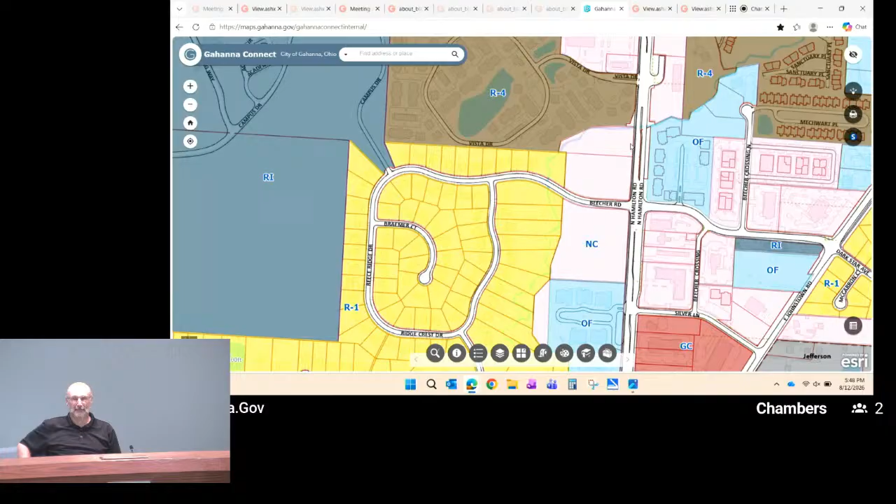Thank you very much, Madam Chair. Michael Blackford, Director of Planning. Before turning over to the applicant and Planning Commission, just a few words. As you said, Madam Chair, the workshop is really an opportunity for Planning Commission and the applicants to have a dialogue that you really can't normally have in a normal Planning Commission meeting. So it's a great opportunity to ask questions of all sizes and shapes and get information that might benefit you in the future when we have applications.

As of right now, we do not have any applications submitted. If they choose to move forward with the project, most likely they would be before Planning Commission with the development plan and probably a conditional use and a variance. After that, they would go into engineering and building permits. So there's more opportunities for engagement, whether it's Planning Commission, staff, or the public. It's really at those Planning Commission hearings that's the most appropriate time for staff and the public to be involved and have words tonight about the project.

This site's a little different than some of the other sites we've seen in the past. So just to make sure we're all aware where we're at, I have a zoning map up here. Zooming out, you can see the properties on Hamilton Road. To the top of my screen, to the north, you have Giant Eagle and Stone Ridge. Here is Beecher Crossing. This is Graeter's, as someone pointed out earlier. And right here, this lower half of the parcel, that's the one we're talking about tonight. The property is zoned neighborhood commercial.

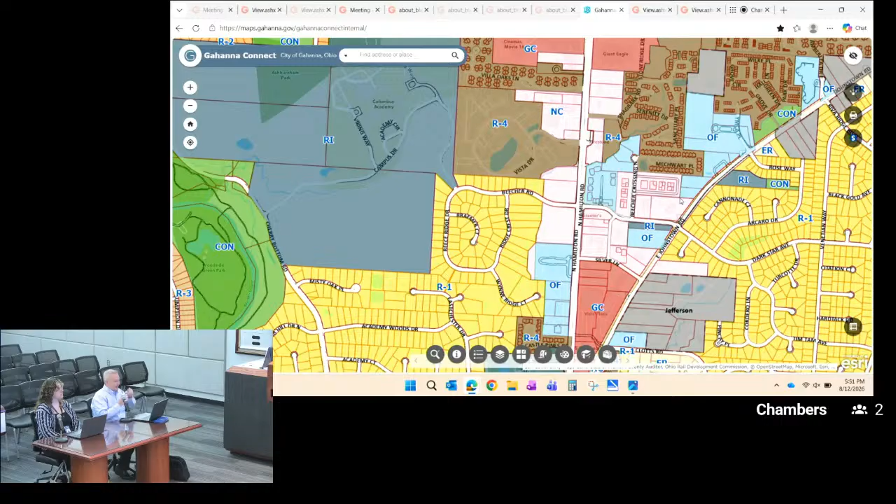There is some project history on this site that I think is relevant for discussion, whether tonight or in the future. There were a couple of applications submitted on this property: one was a development plan submitted in 2018, and another development plan submitted in 2019. I believe Mr. Soriano was on the Planning Commission for both of those applications, and Mr. Greenberg and Mr. Tamarkin were on Planning Commission for the 2019 one. I will show the 2018 project here real quickly so you have an idea of what was approved by Planning Commission.

All right, so on your screen right here, north is actually on the left of the screen, east is towards the top here. This is what was approved in 2018. At this time, it was the Shops at Oberer's Crossing. The flower shop Oberer's was going to be the main tenant. I think it's about 35,000 square feet that was approved on this site. That was approved by Planning Commission.

It was appealed by the neighborhood, and the Board of Zoning and Building Appeals agreed with the residents, so they overturned Planning Commission's decision. That's why we had a fairly similar request in 2019.

That request, I think, looked fairly similar to what we see here, where the proposed building on the right side of the screen was a medical use. That was unanimously approved, I believe, by Planning Commission in 2019. That was appealed to the Board of Zoning and Building Appeals, and they overturned Planning Commission's decision. There was some litigation that happened on the property, and the city entered into a settlement agreement.

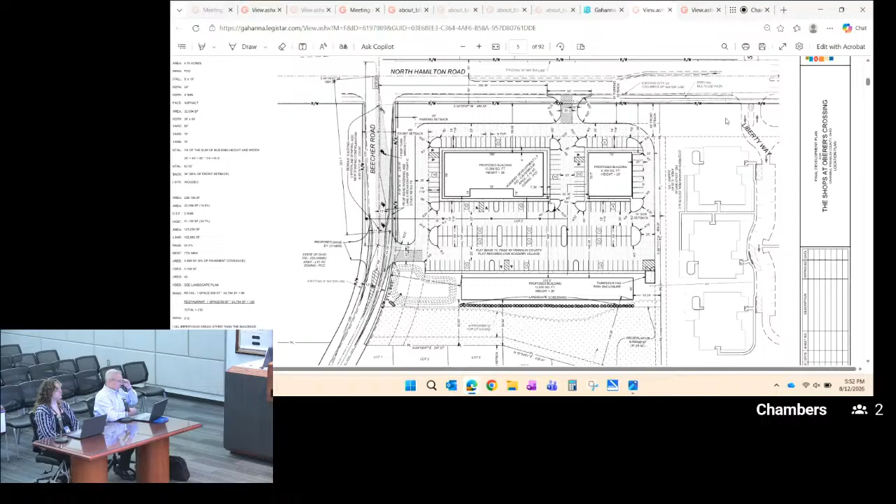And so that property right now has the rights to construct what we see up on the screen right now. So this site plan, hopefully this shows you what the renderings look like. There were one-story buildings, there's not really a good overall rendering here. So they have the right to submit for building permits, engineering approvals, and they could go out here and construct this.

Without needing Planning Commission approval, that is. To deviate from that site layout and building design really requires going back through Planning Commission in 2026 and getting those approvals again through a development plan, conditional use, and design review. If they decided they wanted to build this particular project and operate their facility out of here, they could absolutely do that without Planning Commission approval.

But I don't believe that's the intent or the desire. So this is a great opportunity to work with Planning Commission and the community, and it's really a different discussion today than it was in the past. Commercial is appropriate on the site, and it has been zoned commercial since at least the 90s or 80s, so it's not really a discussion of whether commercial is appropriate, it's really how that commercial is going to look, because now they have entitlements, whereas in 2018, 2019 it was about trying to get those entitlements. So now we're just making sure that what's proposed works for the community as best as possible, and with the applicant. With that, Madam Chair, thank you for your time, I'll turn it back over to you.

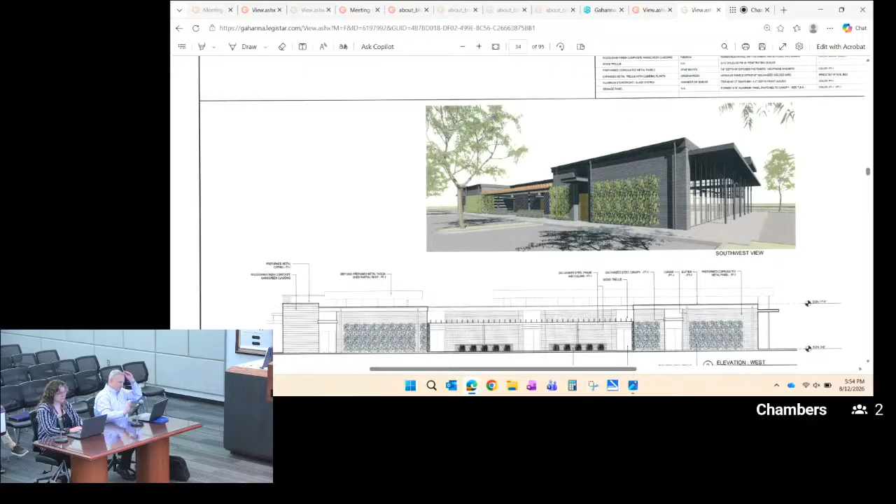Thank you very much for that presentation and the context with the history of the property as well. We will go ahead and open it up to the applicant, if you want to step forward. This is going to be more of an informal session because it's a workshop. I'd like you to state your name and how you're affiliated with the project, and I'm sure we will have questions from the commission or comments.

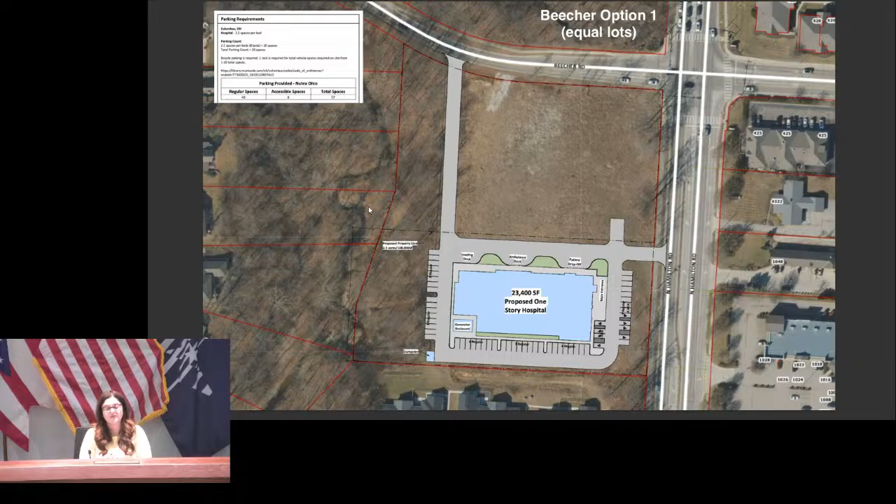Thank you. My name is Tom Cherrick, I'm the president of Wealthy Development. We're based in Akron, Ohio, an 81-year-old real estate development business. We're partnered with Nutex Health, a publicly traded micro-hospital business on the NASDAQ, with a little over 75 different micro-hospitals throughout the United States and expanding. We got involved in this opportunity because we love this Columbus market.

We love Gahanna, we've been looking for a market in Gahanna specifically for the last five years. We have not been able to find the right location with the right traffic, demographics, and the right feel. We feel this is a very good location, so we found it in the last six months. We reached out to the owners and said this feels like the right time to develop a new micro-hospital, create a great service for the community. It actually fills a gap. We're not an ambulance, emergency center, we're not a high-traffic business.

As I heard, there was a previous applicant that looked at doing a similar service. We are a publicly traded company, providing private pay, low density, low traffic, high white glove service for the customers. So it's around 23,000 square feet, single story, very similar to what was designed previously, open 24 hours. So if somebody gets sick, you don't go to the ER, you're able to come here. Private pay, private insurance, homegrown local doctors. The doctors are based here, reside here, lived here, grew up here. They're partners in the business. So it's local doctors, local owners, partners with us. That's our initial speech.

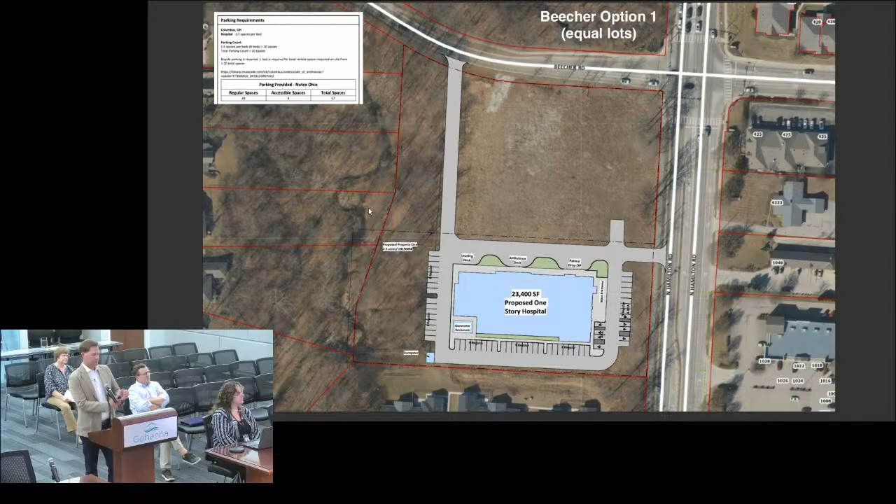Clicker work? It's not working. Oh, nope, you go to the next one.

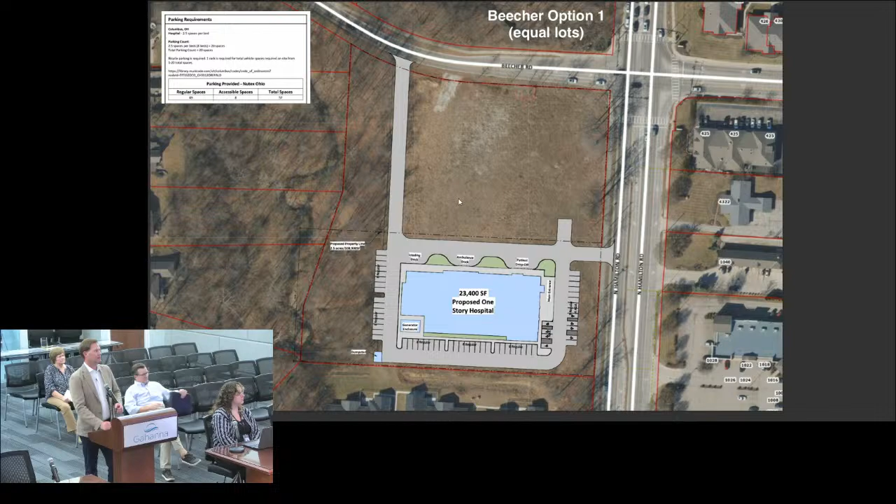Perfect. We've done 70 locations, they look similar to this based on the feedback from the community. Single story, awnings, overhangs. It's 2.5 acres, a 23,000 square foot building, so it's 100,000 square feet of land and a 23,000 square foot building on that land. So it is not overencumbering on this area, it's not too tall, fits in the area, and it is accessible to residents.

Palette, color, final design is always something where we take input from the community, the planning commission, all the stakeholders, and we design and modify to fit the community, but this is the general feel. One story, 23,000 square feet, patient rooms, three or four overnight. If somebody gets real sick, they can stay overnight. They have a small medical procedure, appendix bursts, and they can have it planned. Small medical procedures.

That's our market right there. Not a lot of traffic, not a lot of people coming in and out, a handful of doctors, a handful of nurses, and pre-planned medical procedures. Somebody's son or daughter sick in the middle of the night, not worth going to the ER, they're able to come here. That serves our purpose. So I want to open up to questions.

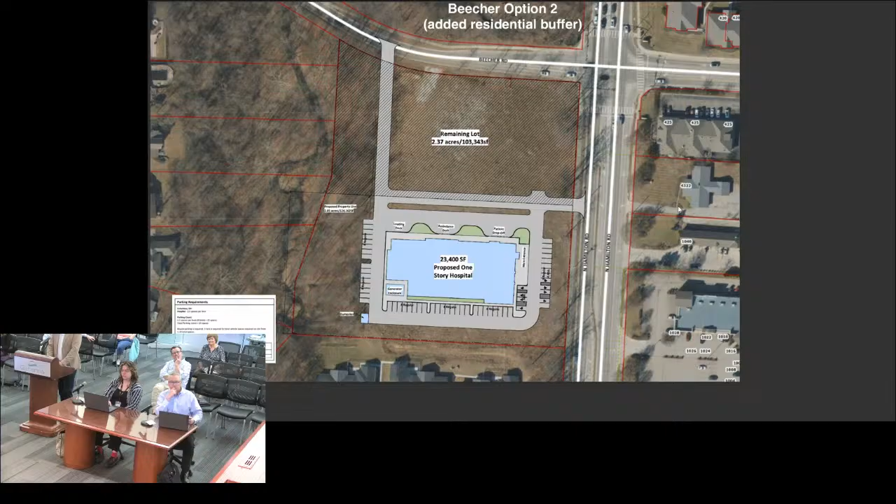Is there any thought, if we went with something like this, about water detention — will that come later in the engineering drawings, I assume? Yes, so in the initial concept there'd be a water detention plan with the civil engineering, in conjunction with the current owner, that would be complementary, trying to be very efficient and aesthetically pleasing, but that's further down the conversation.

Okay, well I'm sorry if I wandered off and you hit on this — how did your discussion with the HOA go? Very well. We're open and honest always with all neighbors, always community, because they're our clients and we are neighbors.

It's very important, especially when you're a contiguous property, to have a very open relationship with your neighbors. So we talked about our size, our traffic, our opening hours, how we're not a company that has 400 cars coming in at 8 in the morning when school lets out. We're not a business that affects that. We're not an impact there. Very open conversation about nighttime patients - they stay, but it's quiet, internal. We're not coming in and out during school hours, not impacting when they go to school or when the community goes to work or comes home. We're not a huge impact there. We're a very boutique, white glove service business.

I was just going to throw this out there - being a hospital, would you accept any emergency squad, anybody? Over the last 10 years, we've had one ambulance come to one of our locations. That was due to an emergency where no other facility was open and available within life-saving time, and they came to our facility, and we welcomed them. It is not our target market. It does not happen very often. There are buses that show up, but their lights are not on - they're transporting them from a different facility. It's managed care.

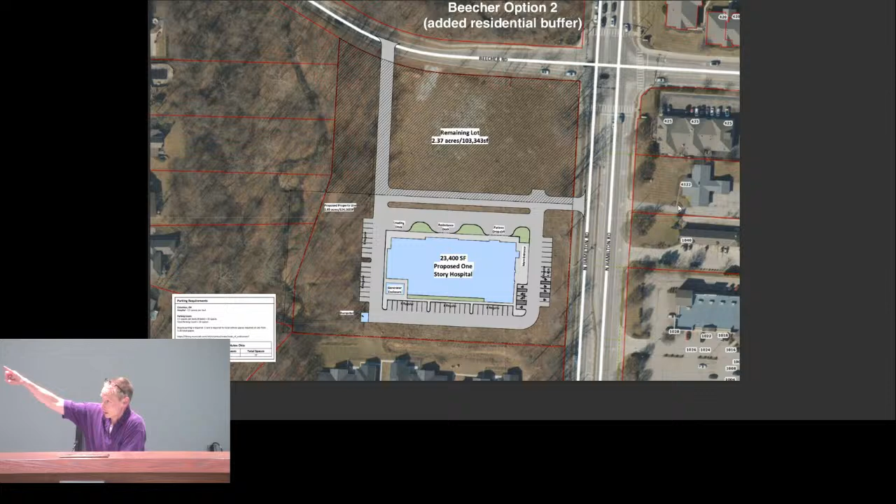And that's just one person speaking here. And then I would also be correct to assume that if this came to us, you'd be constructing both access points to Beecher Road and Hamilton Road at the same time? Yes. Okay, it's not going to be a phased type thing.

Okay, and how many beds would the facility have approximately? 3 to 4 procedure rooms and a handful, less than 5 actual patient rooms where they come and check in, where the doctor rotates people through. Okay, and...

With your other facilities, are there a lot of overnight stays, or is that just on an as-needed basis? As needed. In general, over a given 30 days, there are multiple overnight stays, but those are for planned procedures where they have a procedure done and are meant to stay overnight and then get released the next day. Okay, so it's not going to be a high volume, high turnover type of facility? Okay, alright, thank you. Those are my questions, Madam Chair.

Thank you, great. Mr. Soriano. Yes, so it's kind of funny that maybe I am the elder planning commission member that was here in 2018 when we went through this before.

If I recall, I think one of the big topics of discussion was traffic on Beecher because of the lineup and access to Academy. We talked a lot about site intensity and what that meant for the way it was zoned, and the potential that the intensity could vary considerably depending on what type of development went there. So it's actually good to see something similar to what we approved.

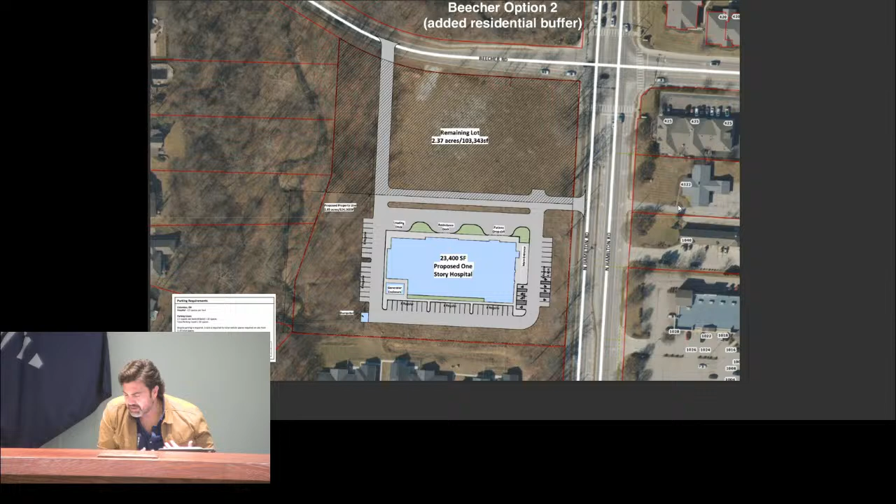I did have a couple questions. Mr. Mako covered a couple, but would we expand a little bit on what micro-hospital means? Is it more like ambulatory care? You mentioned procedure rooms, you mentioned some inpatient rooms. How would we classify this?

So this is a true micro-hospital. If you need your appendix out, you can schedule that at this location, have the surgery, stay overnight, and get released the next day. If you need your bones reset, you have a broken bone, you get a cast, and if it needs surgery you have an orthopedic person actually do the surgery here and you'll get released the same day. So it's a full range from orthopedics to appendix, with a handful of local doctors doing procedures here.

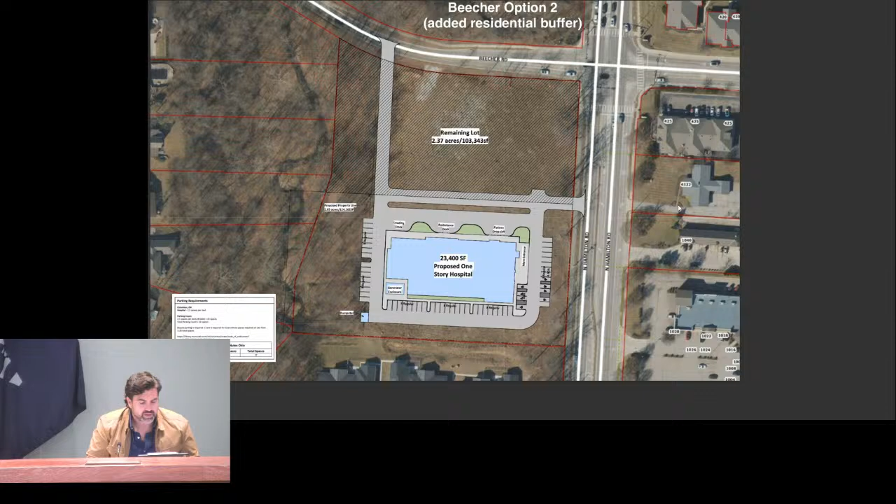I prefer a little bit of that buffer off of that spine that's coming in. I think it also sets up the lot to the north with a little more flexibility, and potentially some buffering on that strip, as Mr. Mako and Mr. Shapaka were noting. So generally it makes sense. The rendering looks like what I would expect for a micro-hospital.

I don't really have any more questions, mostly comments. So thank you. Ms. Laser.

Thank you. They asked most of my questions, but about how many doctors and nurses or staff are there on a given day?

Doctors rotate through during the day, so they may be there for 4 hours. On average, 8 to 10 people in the building working. A doctor may be there for a procedure, then leave, and another doctor comes in for the next procedure.

And I also liked option 2, for a vote. Okay, that's it, thank you. It gives us a good basis to start our conversation.

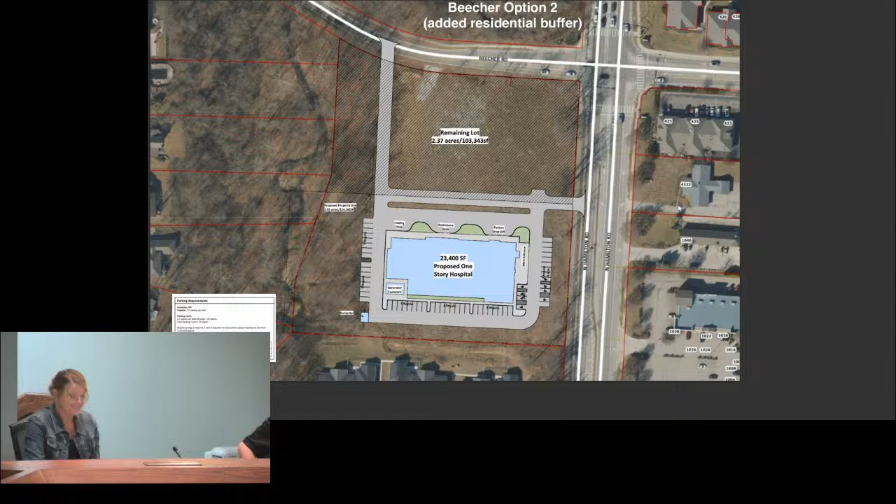Great. Mr. Greenberg. Hi there. I have a question about the patients coming in. So it's not just a 24/7 emergency room—you can make appointments and get your surgery. But it's kind of strange, if you have an appendix, that's more of an emergency.

It was an example, like gallbladder removal. So what happens if you're very successful—which we'd hope you would be if you got approved in Gahanna—and you're getting lots of appointments, more than what you're describing today as a pretty minimal effort, and it turns into a lot of customers coming in. If you're successful, all of a sudden you aren't a micro-hospital anymore.

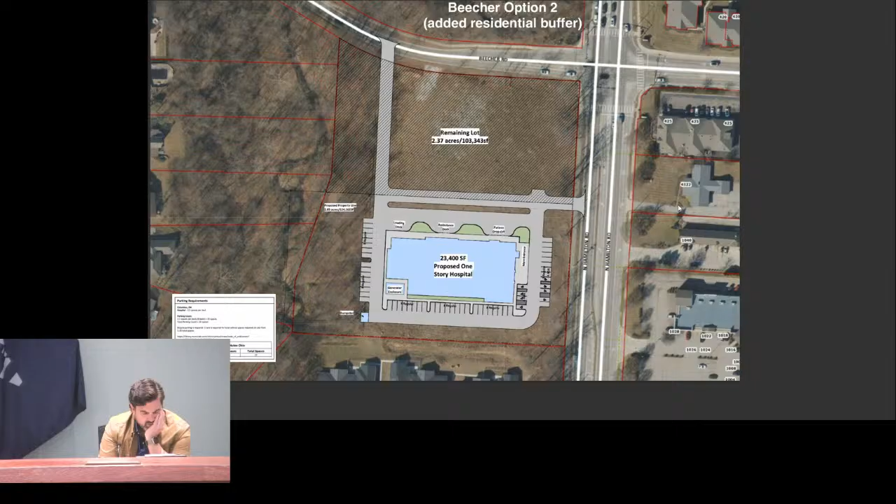So thank you for the question. Our business model, when we enter a market—Columbus is the MSA—is to have multiple locations. This is our first location in this market, and we would be looking to open additional locations.

That relieves much of my question. Got you, okay, so there'd be more than one in different communities, okay. On that, are those sites behind the hospital still there for development?

Do we know? I assume that's part of the property. Mr. Greenberg, are you referring to the red boxes to the left? Yes. Those are part of the residential lots, residential, of Academy. So if you were to measure where their proposed building is and go to the west, to the left of your screen, to where that home is, that's right.

About 405 feet or so. So those are very deep lots. What's our zoning say as far as that? How close can they be?

I love using the Shops at Rocky Fork as a comparison since it's right down here, basically the same zoning where the commercial is and the same zoning for those residential. So code is going to say 10 feet, plant a tree every 40 feet, and have a fence. Here we have, not all 400, but let's say 350 of those feet are heavily vegetated areas that communities would probably love to have as the standard, because it really mitigates the perceived incompatibilities of commercial and residential. So we basically have about 40 times what the code requires for separation in this case.

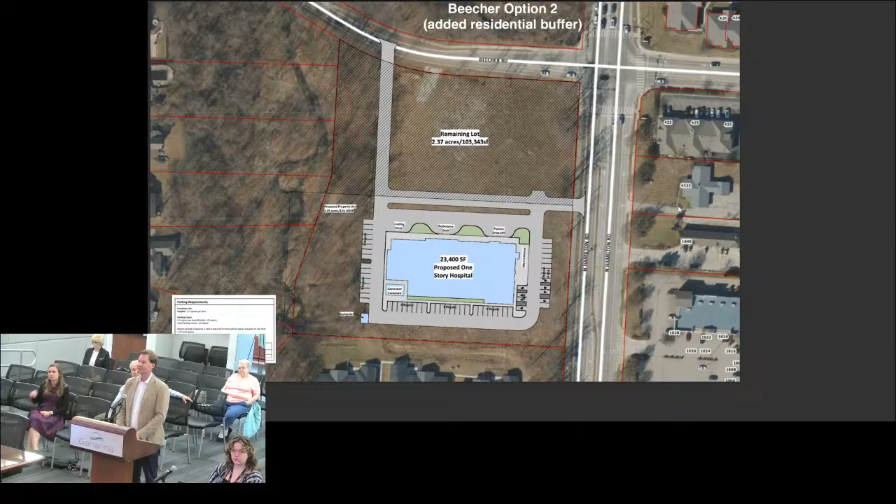I guess a couple of comments on things that went wrong the second time, in 2019. First, I think that land behind is very sloped with a creek through it, so it's really not developable. You can kind of see the creek in the picture there.

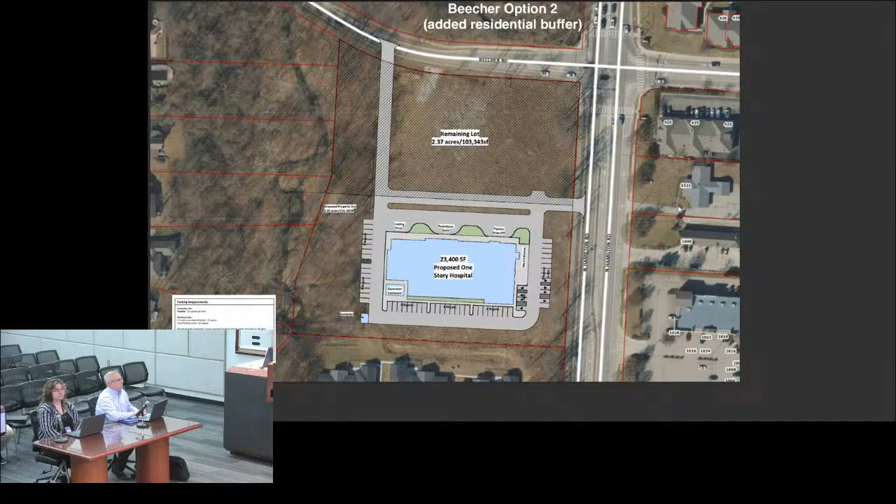But following up on Mr. Greenberg's comment about a fence, or some plantings — the last time, I don't know what the second was, in 2019, the residents were very concerned about what they see and what they hear, and I think that could be mitigated, possibly with some greenery, some plantings, or as Mr. Greenberg said, a fence.

They were also concerned about noise, so you say there's no ambulances or very few, but the picture you showed had an ambulance in it. So medical transports don't have lights or sirens. They transport people from a senior care facility to a micro hospital and back, as a medically licensed facility, for somebody that needs help. It's not a full lights-and-sirens ambulance. It's a medical transport, one time in 10 years for all facilities — it's not a target for ambulances.

There are other facilities within the community that can handle that. If there's a need for someone in the neighborhood for an ambulance, they're driving past you and going to Mount Carmel. They're not stopping at your hospital with lights and sirens, unless you ask them to stop specifically and you made an appointment or have a relationship — otherwise you're going past.

I'm aware there's 81 houses in that community, so it's not a substantial community. No, but what you have there — there's a private school back there, and this is one of the two exits from that school. So that neighborhood is very sensitive to traffic, very sensitive to Beecher Road backing up from 7:30 to 8:30 in the morning and from 3 till 4 in the evening.

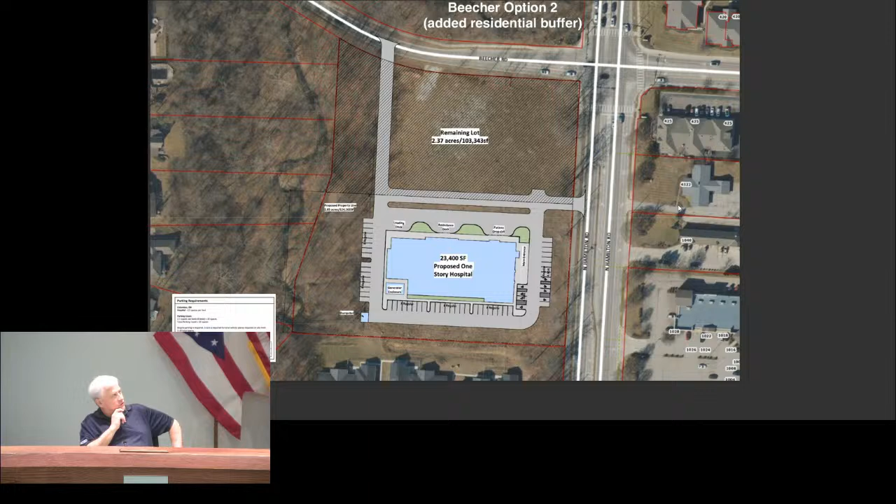So it's right-in, right-out on Hamilton. It's only going to be right-in, right-out. There's a median — or is it a fifth lane? No, a median. There's a median, okay. So you have to come in. First, the fence.

We talked a good amount with the HOA and listened. During the winter, if this moves forward and gets welcomed by the community and the planning commission, we would actually go out there in the winter to see what it looks like with the leaves off, because she shared openly that you can't see this property in summer when leaves are on and it's green, but in winter you can. I said, let's get pictures, and you need to do the right thing for the community since you're neighbors long-term. There's a lot of slope back there, so a fence might be more difficult than shrubbery or landscaping to treat it appropriately for the winter months, not just the whole cycle.

For the access, we talked a good amount about traffic. We are not high retail, not selling a lot of coffee at 7:30, 8 o'clock in the morning with hundreds of cars. We're not selling chicken sandwiches. We're boutique during the day, not at 4 o'clock when everybody's leaving after sports practice. We're not creating hundreds of cars. That's not our market, that's not our goal, it just doesn't fit our business model.

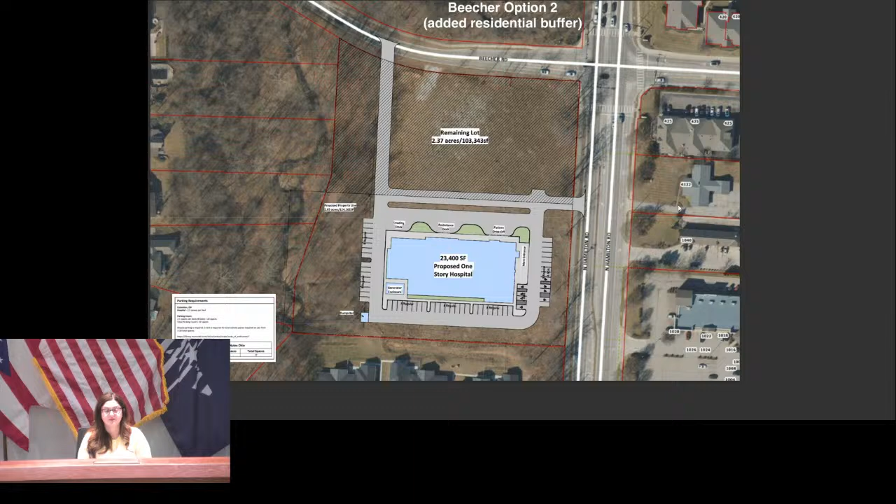Yes, I have one, Mr. Greenberg. One additional question. We've talked about how it's for procedures. I'm feeling terrible, I've got a really bad cold, maybe pneumonia. Can I just stop in and see a doctor at 2 in the morning because you'd provide that service? Yes, okay, yes.

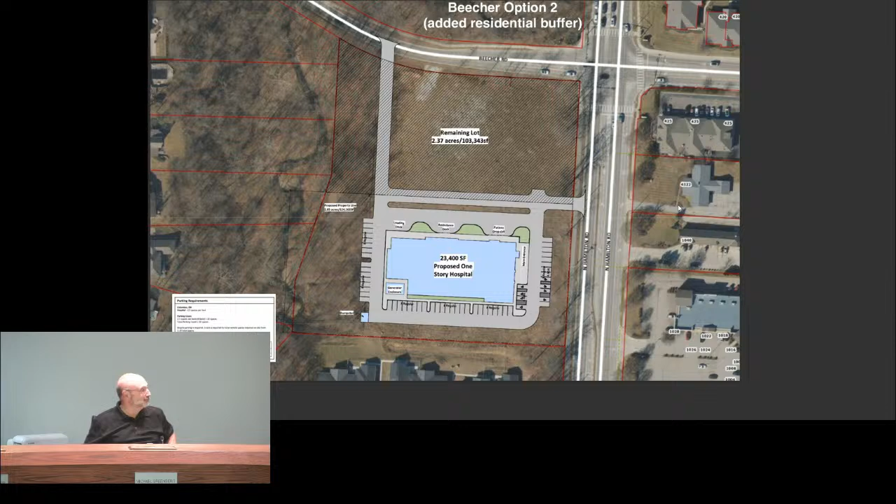Thank you. Mr. Mako and then Mr. Chapaka. Thank you, Madam Chair. One additional question, and I'm not going to hold you to this, but do you have a timeframe for feedback and then submitting a formal application?

Based on the feeling I'm getting from this committee, we would move forward with our purchase agreement, closing on the land. Within 4 months we'd be going through our planning commission, design, permitting process. By the end of the year, by spring, I want to be in the ground. Okay, fair enough. I was just wondering how advanced you were in your plans.

Yes, so we have a template, a business model we repeat over and over in different cities. We take the same rectangle and put different skins on it to make it aesthetically pleasing to match the city. So it's a very efficient process for us. Okay, all right, thank you.

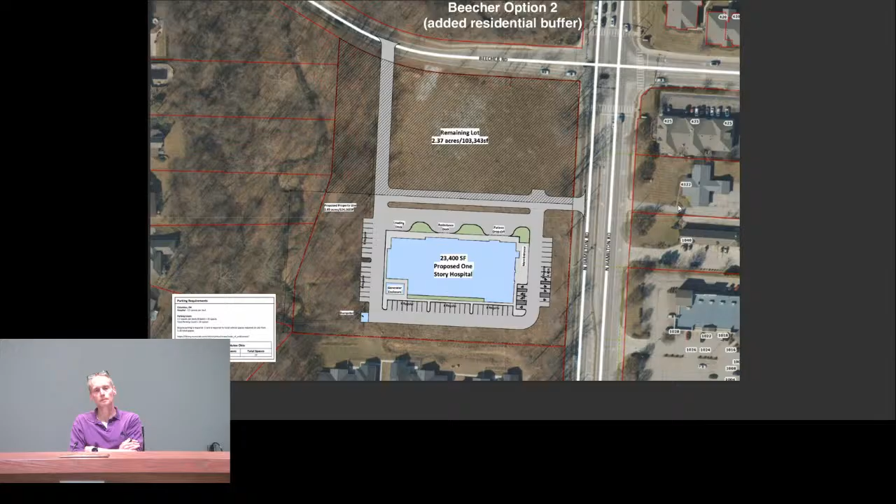Thank you, Madam Chair. We have a few more minutes. Mr. Chapaka, go ahead. Thank you. Micro hospital again. So you don't have yearly checkups there, you don't have a doctor working out of there, you're coming in and doing your routine stuff.

That's not our target market. Okay, not our target market. So I'm still having trouble with the numbers, because I'm used to hospitals having beds upstairs, floors and floors of beds, and you're not proposing that at all. Everything's down low. So the micro—I'm just kind of interested to see how this all plays out.

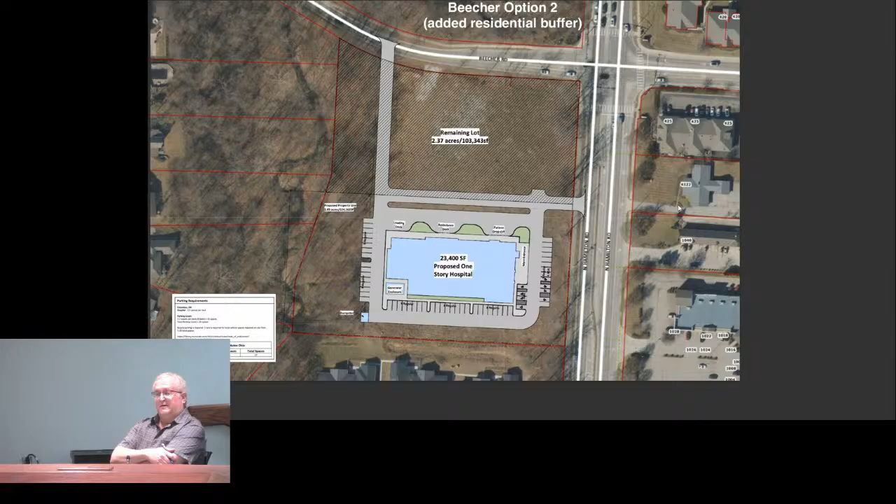Rotating doctors are there for a handful of hours, do procedures. The patient stays. The business model is to rotate them through, one a day, and they rotate through, do a procedure, doctor comes and goes, they can go work at a different hospital and do other things. This is not their only operating place, and it's a very efficient, lower overhead business model.

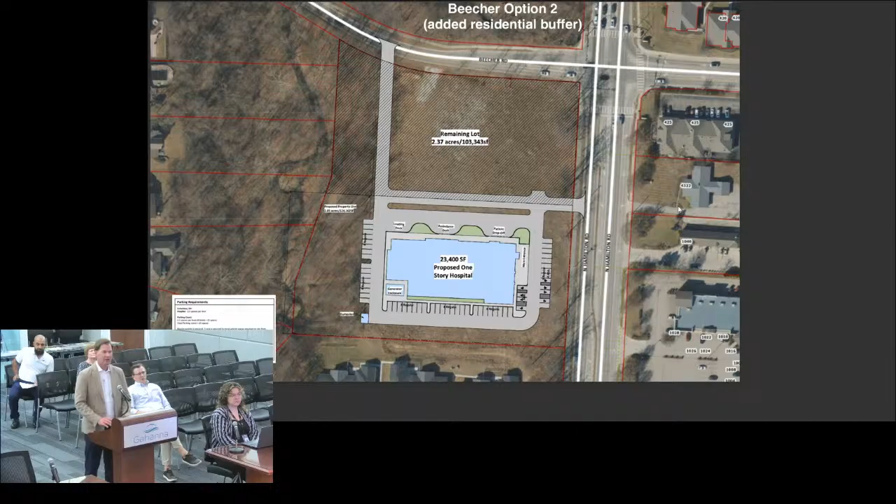Very interesting, thank you. So, Madam Chair, anybody else have any last questions? Okay, well, thank you again for coming tonight and presenting us with this project and providing us with very good information. Thank you for your time. Yeah, absolutely, thank you, thank you. Adjourned.

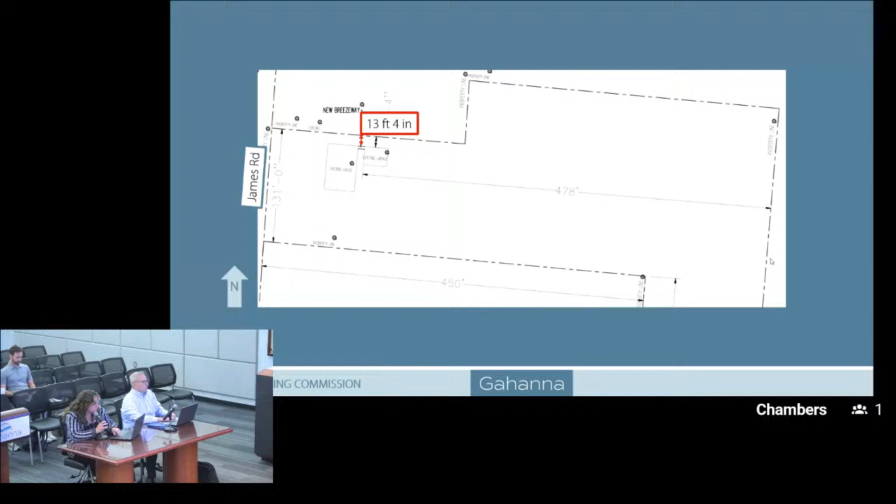So there's one variance included with this application. It's for Chapter 1103.06E, which states that the side yard setback for principal structures is 20 feet. And as mentioned, the proposed breezeway is only 13 feet 4 inches from the north side property line. This is the standard variance criteria that must be met in order for the application to be approved. Staff recommends approval of the variance request as submitted.

As mentioned, the addition is the same distance from the property line as the existing house and garage, both of which were constructed in the 1960s. The addition is relatively small and will replace an existing paved sidewalk that's currently in the same location.

Thank you. We will now open public comment. Would the applicant like to speak? Ma'am, are you the applicant? Yes. Oh, and you would not like to speak? No, I'm just asking. No, I mean, she presented everything. Okay.

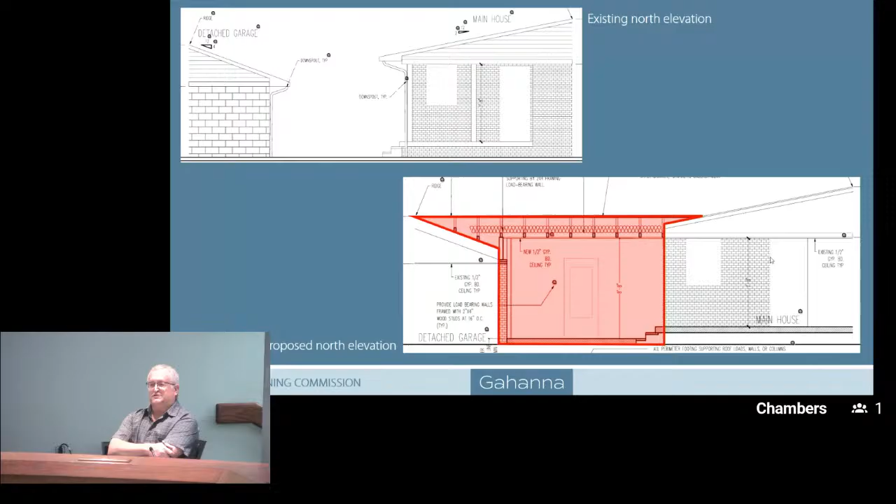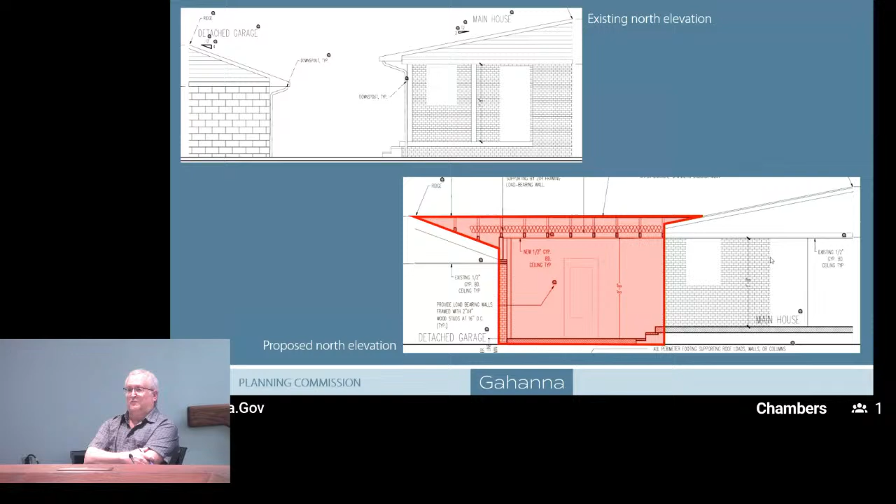Go ahead, Mr. Chapaka. Breezeway, so is this open or is this an actual enclosed structure? Enclosed. It will be enclosed? Yes. And the materials are going to match everything with the house, kind of a deal? Yeah. Why now? I just don't want to go to the exercise area in the winter when it's cold. So that's your reasoning, is just to get to the garage without going out into the weather? Yeah. We got that on record now, thank you. Okay, thank you, Madam Chair.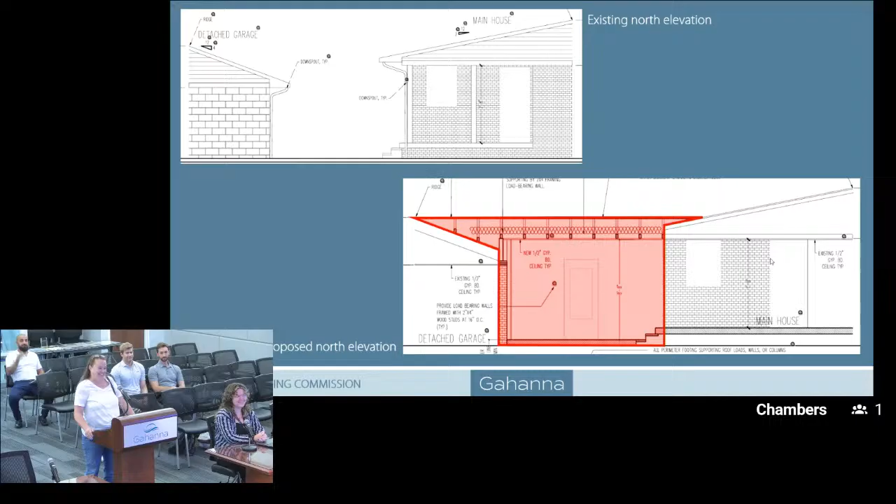Mr. Mako: Thank you, Madam Chair. Just a couple questions for the administration.

Based upon your knowledge, when the house and the breezeway were constructed, are you pretty certain they were in conformance with the zoning code at the time? I don't think I can answer that with confidence, but I'd assume so. I think our zoning code was established in the 50s. 58. So there was a code in place, and I'm assuming it met the zoning code if it was in the city at the time. Okay, fair enough.

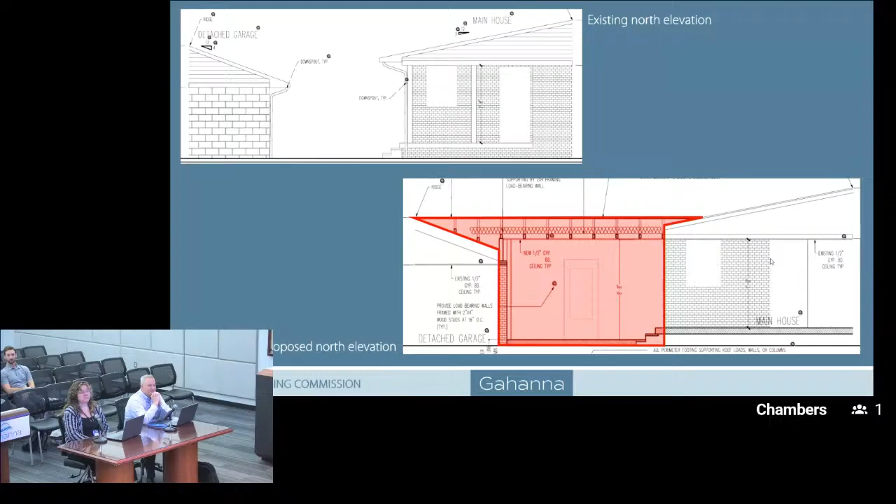And would it also be correct to assume that, based upon the presentation of what's out there, both the existing house and the existing garage are existing non-conforming structures? Correct. Okay, just wanted to get that clarification. That's all the questions I had.

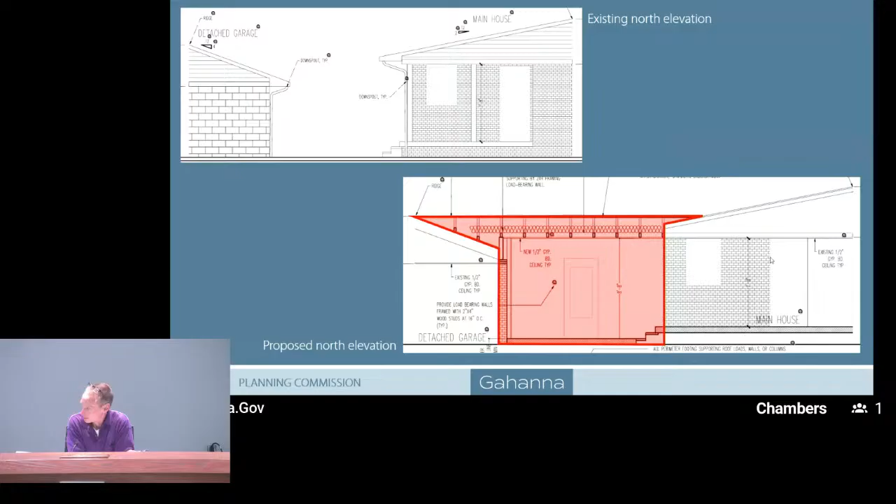Mr. Soriano: I have no questions. Seems pretty straightforward. Ms. Laser: I have no questions as well. Mr. Greenberg: No questions. Mr. Tamarkin: No questions. Chair: I also do not have any questions tonight.

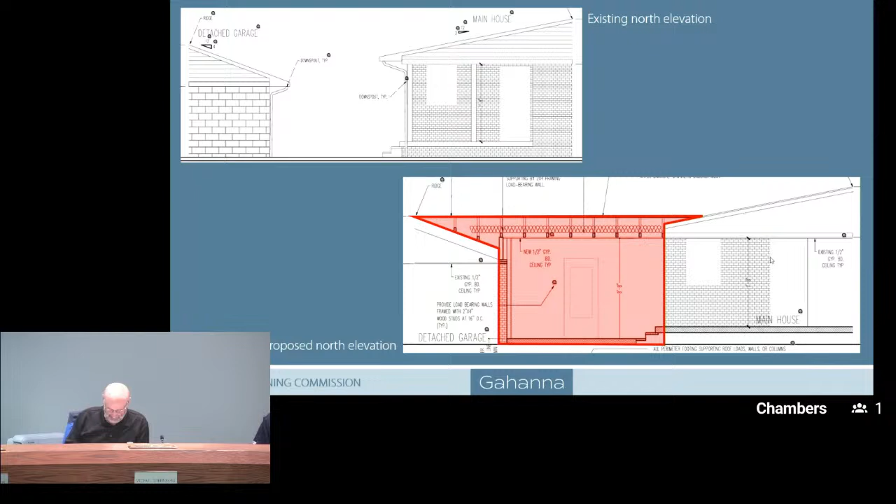So we will move on. Do we have a motion to approve V-0014-2026? Madam Chair, I move that we approve V-0014-2026 to consider a variance application for real estate at 258 James Road. Do we have a second? Second, Tamarkin. Okay, we have a motion by Mr. Greenberg, seconded by Mr. Tamarkin. Any discussion on the motion?

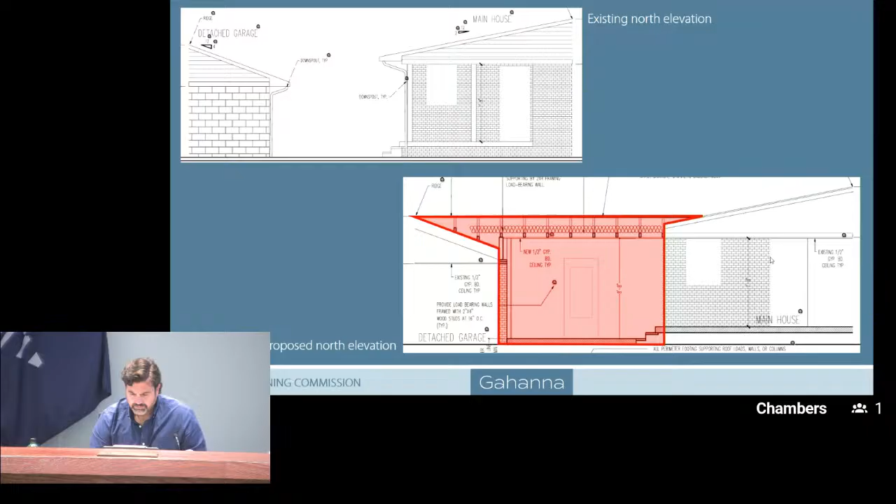Mr. Mako: No comments. Mr. Soriano: I'll be in support of the variance for the reasons staff outlined, the alignment with the house, it makes a lot of sense. Ms. Laser: No comment. Mr. Greenberg: No comments. Mr. Tamarkin: I also don't have any comments tonight. So, Madam Clerk, would you please call the roll?

Greenberg, Yes. Tamarkin, Yes. Mako, Yes. Polly, Yes. Chapaka, Yes. Soriano, Yes. Laser, Yes. Okay, motion carries. Thank you.

Moving on in our agenda, the next variance application of the night is V-0015-2026, to consider a variance application to vary section 1103.07E, large lot residential, of the codified ordinances of the City of Gahanna, to reduce required frontage for property located at 360 Carpenter Road, parcel ID 025-002216, current zoning R1, large lot residential. I apologize if I don't pronounce this correctly, Mohamed Zamara, applicant.

We'll start with the administration. You can have a seat, sir. We'll have the administration do a presentation first, and then you'll be asked to come up and speak. Would the administration like to give a presentation?

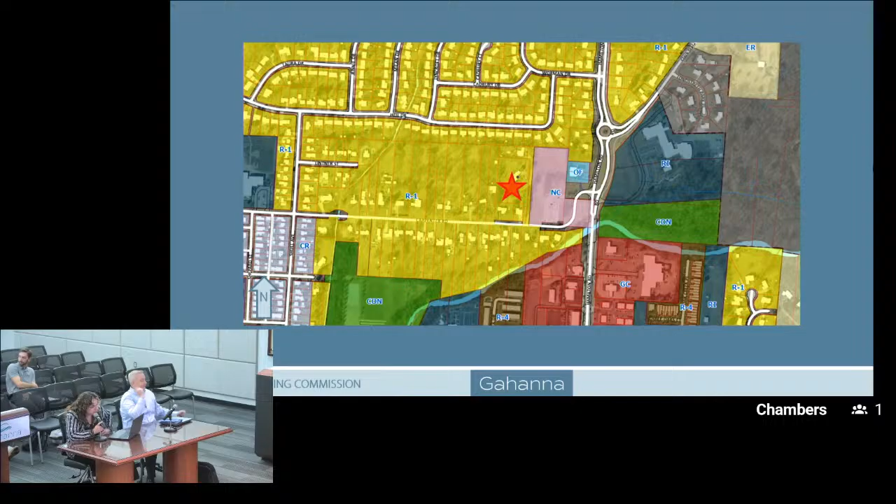There's a bit of history on the site as well. In March of this year, Planning Commission denied a variance request for a lot split that created a new lot with zero frontage on a public right-of-way. At that time, the proposed lot size for the smaller lot associated with the variance was around 0.52 acres. This variance application was denied due to concerns that a future house constructed on the lot would be too close to some of the neighboring properties. Based on this feedback, the applicant increased the proposed lot size to address the concerns from the commission and neighbors.

So same as before, the applicant is requesting approval of a variance for a lot with zero frontage on a public right-of-way. The zoning code states that all properties zoned R1 must have 100 feet of frontage on a public right-of-way. After the proposed lot split, it would create a new parcel that has no frontage. This parcel would have shared access from the existing driveway. The existing parcel is a flag lot that only has 27.5 feet of frontage, so it's already non-conforming with the zoning code.

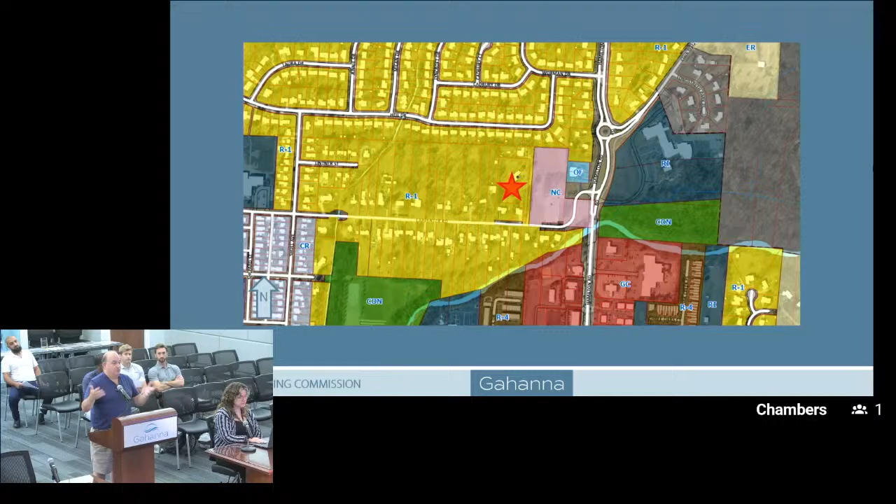But in any event, I feel for the 2 people out front, Mike and Lee. Their properties would be more subject to this than anybody because they're new to the neighborhood, and they bought their homes with green space behind them, and now there could be a house sitting there. But for me, it's the privacy. You're changing the layout of the land, the neighborhood. It was very rural on Carpenter Road, and that's the beauty of Carpenter Road. You just don't have that in too many places in Gahanna.

And I guess that means my vote's no. Thank you. Any other speakers tonight?

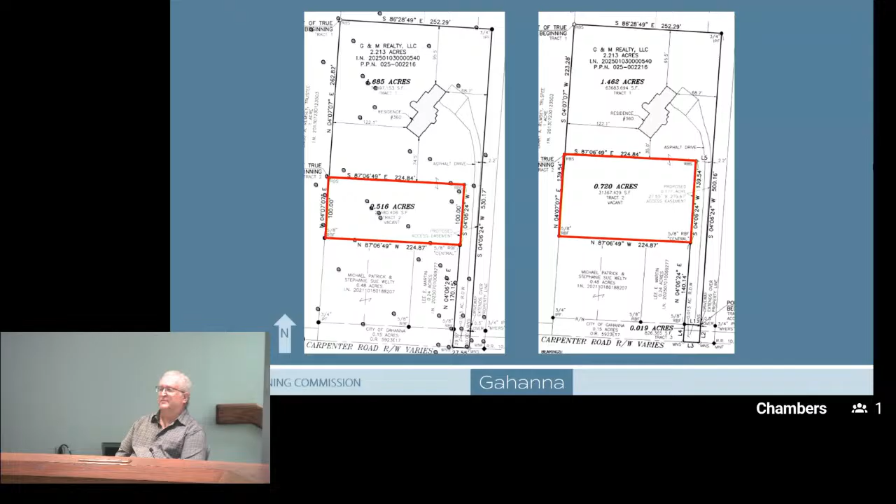Thank you, Madam Chair. Maddie and Mr. Blackford, setbacks, setbacks, and setbacks. So our side yard setback for this property is 15 feet. Just listening to the neighbors' concerns, could the variance, or if this goes in a certain direction, when does a discussion on changing the setbacks happen, or requesting, instead of a side yard setback of 15 feet, we would say it has to be 50 feet?

You could add a condition of approval on the variance to modify any of the setbacks if desired. Okay, so that would also include, since this is the front, and coming off of the drive 25 feet, because the house above it is actually coming across the east property line, now we're coming 25 feet off of the drive line, so the building goes back. So that would be conditional also, that if we wanted to drop that down to 15 feet, per se, we could make that a condition of the variance. Correct.

Good. Thank you for coming before us again. I know you're pretty passionate about getting another lot in there, and you understood what the neighbors were asking for, and I think the accommodations of the size of the house and these possible setback limits really kind of lock you in where that house can go, because that would help the overall painted picture of what you envision the lot to be. Because right now, I'm looking at that big open space, I can push that all the way to the west, and as you hear the comments, a lot of the issues come into play with the neighbors.

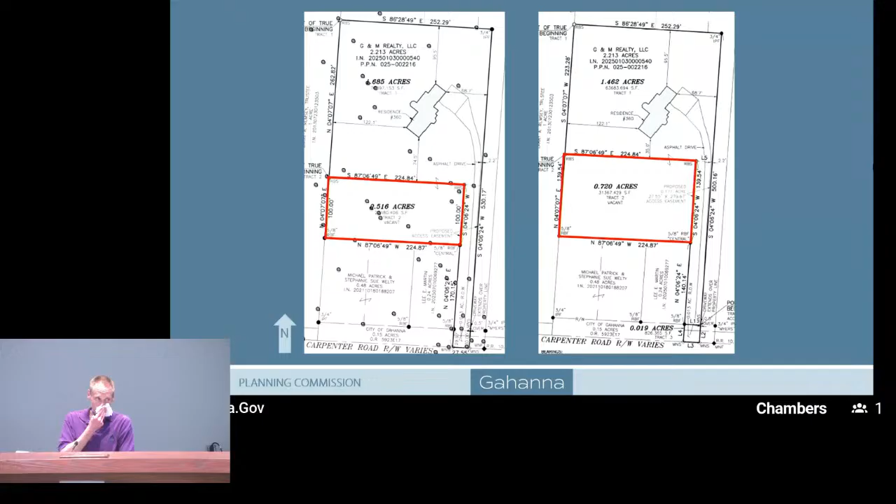No other further questions? Mr. Soriano. I guess one question, one's more logistical, on the shared access. What is the general idea, as these properties are owned by 2 different people, how does snow removal work? I'm just thinking of practical things that a shared access would necessitate. How does that work?

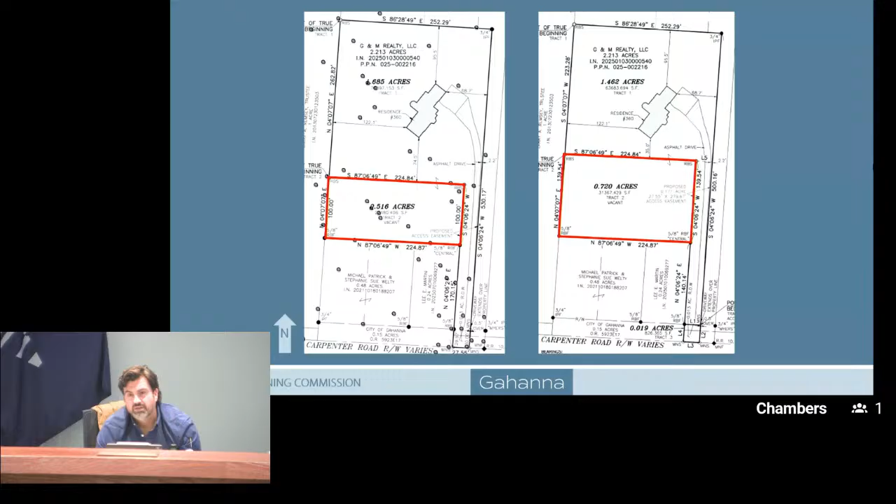I am not sure, but I would think we will draw in the deed that this has to be maintained. And the 2 neighbors will have to share the responsibilities for maintenance of the shared access, as far as pavement, snow removal, and everything else.

In terms of a variance, one of the criteria is hardship or practical difficulty. For example, if a lot is in a flood zone and someone needs to move their shed to a different location within a setback. But what is the hardship or practical difficulty here? This lot is already zoned residential and used as residential property. What's the practical difficulty on the site other than just a want to divide it? The difficulty is access. We do not have 100 feet on Carpenter Road, but the new lot will have 139, almost 140 feet on the shared access frontage.

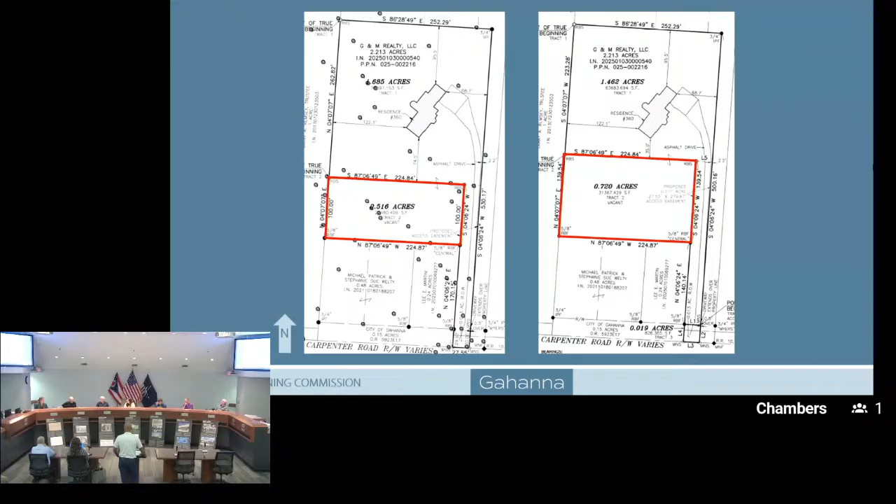Ms. Laser: I don't have any questions, thank you. Mr. Greenberg: Where does the driveway turn into the smaller lot?

It's not on the drawing, I don't think. The driveway is to the right of the drawing. Is it going to be at the beginning of the lot, middle of the lot, or back of the lot? From the right, from Carpenter Road all the way to the end of the north line, red line. So does it go onto that lot? Past the proposed lot to the existing house. I see the existing house, but the lot to the south, where does it turn into the smaller lot? The smaller lot will have 140 feet in the shared access. Okay.

Several of the neighbors have brought up the issue of drainage on the property and how it affects their property. Is there any plan to deal with drainage from your property to make sure there's no impact to their property? For sure, we will comply with the city guidelines and rules when it comes to drainage, and we make sure none of my neighbors will be hurt.

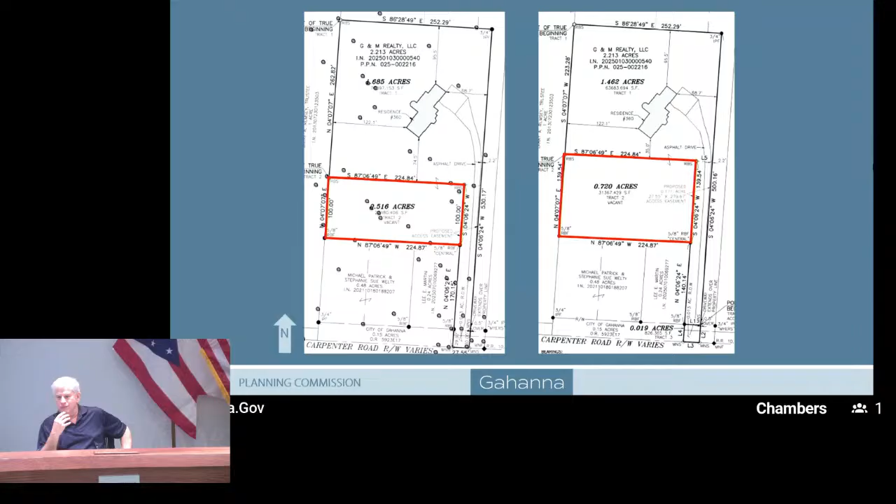Okay, that's all my questions. Mr. Tomarkin: Thank you, Madam Chair. I'd like to follow up on Mr. Greenberg's last comment for the administration. Drainage is not our purview here at Planning Commission, but I assume to get the permits, the city would require that the water management and drainage is in compliance, and would have no damage to any of the neighbors.

The difference between residential and commercial is that on a commercial project you're used to seeing more of a development plan with all the appurtenances for the building, including drainage. With residential, that's not a public hearing kind of permit, so we're less familiar with how residential permitting gets done. There is a review for drainage on the initial permitting, and there's also a final grade inspection to make sure it was developed in accordance with that permit. So there's the paperwork side, reviewed by our engineering team who implement those rules and regulations for drainage, and there's also supposed to be an inspection prior to any occupancy of the structure to make sure that was done correctly. So it's basically the same level of review that a commercial site gets for drainage.

So is it fair to say the neighbors will be in no detrimental shape compared to where they are today, hopefully an improvement? Well, to your point, that's the requirement - you either have to improve it or you can't increase it. That's the big difference between development today and development from 50 years ago, and that might be the biggest difference, those drainage requirements. So yes, they can't create a negative impact. They have to keep it as is, not increase any runoff, or make it better. Thank you.

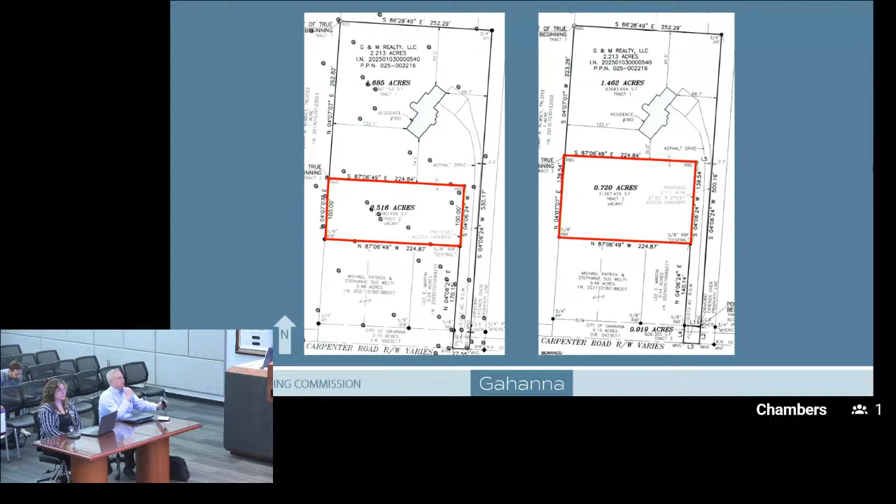For the applicant, you're talking about widening the driveway from 10 feet to 20 feet, all the way to Carpenter Road? Yes. So on Carpenter Road, right now you only have 27-foot access. Code calls for 100. Somewhere along the way, this lot was created with a 27-foot access point, whether that was approved or not. I guess now it's grandfathered in. So now you're going to have 20 feet of pavement there out of 27 feet. 22 out of 27, correct.

22 of the 27 feet will be pavement. And your reason for going to 22 feet is so that two cars can pass safely without driving on the grass. Exactly. Okay, Madam Chair, that's all I have.

Thank you. I have a question. I wanted to follow up on something that Mr. Soriano asked, which is I want to get into more of the hardship angle. I understand why you want to put another house on that lot and split the lot, but what is the hardship as to why this needs to happen?

Why is the variance needed? Like Mr. Soriano said, one of the criteria to grant a variance is you have to show a hardship as to why you're asking for this, essentially that nothing else you could do would achieve the goal. I'm not speaking very well right now. I don't know if we could put the variance criteria back up.

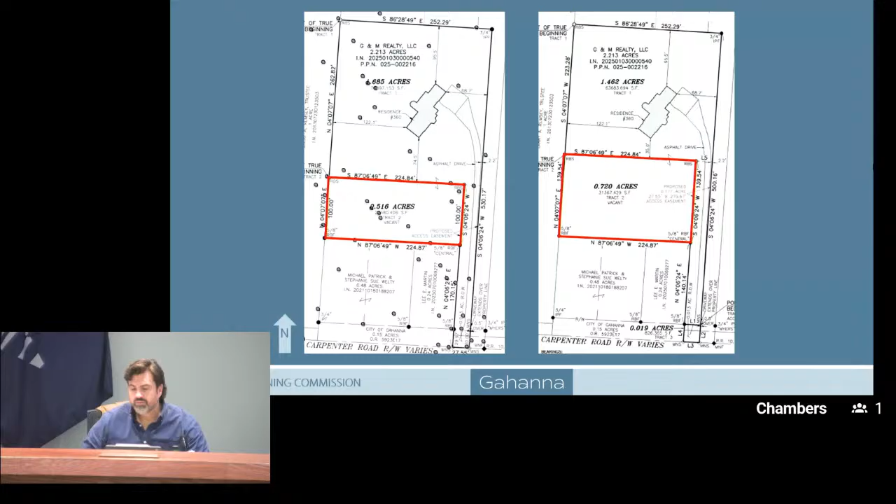Can I rephrase? The property's already used residentially, right? So it already supports its use as a single-family home. So what is the demonstrable, practical hardship that reducing or creating the new parcel solves? It's just subdividing the property so that you could put another house on it. I guess that's the gist of my question - is the only reason you're wanting to do this because you want to put another house in and then sell that house?

I could retain it or sell it, but for sure it's going to be a residential, single-family home. It's not going to be an apartment. It's not going to be a condominium. It's not going to be commercial. It is going to lie within the city code and respect the neighbors and their privacy. And I believe the size of the lot will allow us to put a very beautiful house, 2-story, 3,000 square foot, without having any bad effect on the neighbors. It will sit just right there.

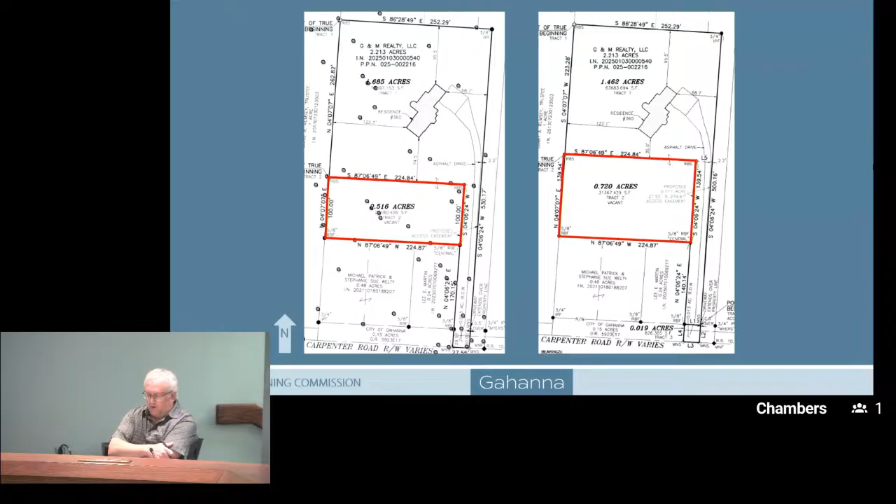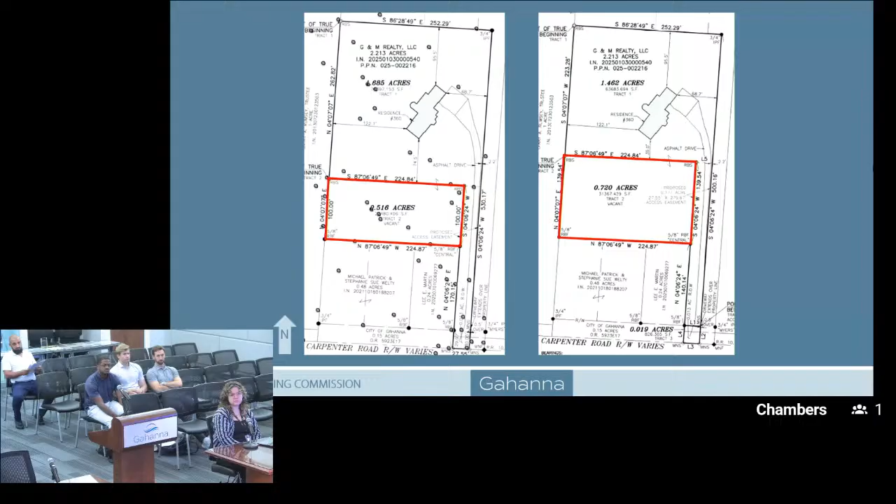Mr. Shapaka? Thank you, Madam Chair. When this came across us before, I was a no vote. I do appreciate the response to that, but the variance is asking not for an additional kind of a lot, it's the zero frontage that I had an issue with before, and I don't see how, if the lot getting larger is going to accommodate that. If somewhere along the line we came back with some setback limits to help satisfy some requirements, it still does not meet a variance for a setback. It just can't be met.

The flag parcel, wherever it came into play, whether it was a property sold to the east, however that was generated, just does not fit the rest of the properties on Carpenter Road. It seems like an anomaly. And adding another lot on there as a variance and a hardship, which was brought up, I just cannot support it. Thank you. Mr. Mako. Thank you, Madam Chair.

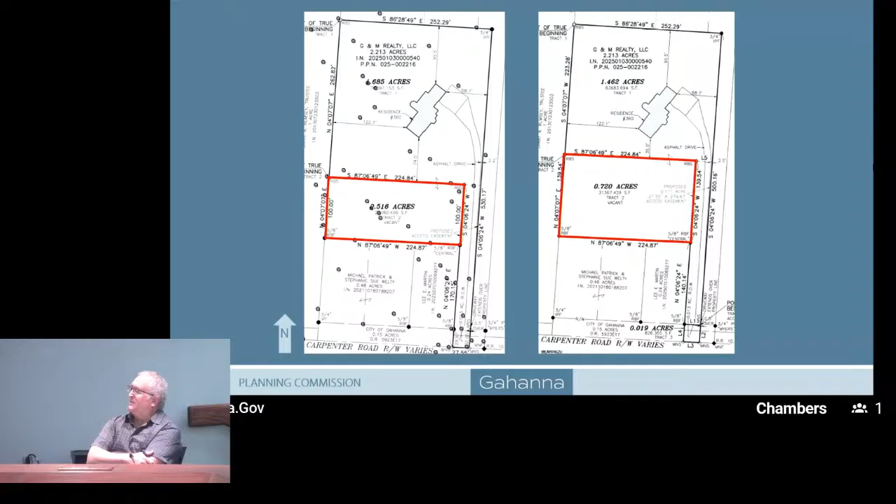Unfortunately, I was not here back in March when this first came before us, but I did watch the Planning Commission meeting that night, so I get a sense of the thoughts at the time. But now that I am here,

I also am going to be a no vote on this. My question about setting precedents is relevant here, and I also agree that I don't see a hardship. The road frontage has probably been chewed up over time, and what we have left over is what we have left over. Unfortunately, the person who bought this property, this is what you have, because that frontage has been taken over throughout the years, and this is what you're left with.

So this is really just the end result of what's happened over the years. I totally empathize with the current property owner, but again, I just don't see the hardship, and I don't think it's a good idea to have zero lot frontage. I just do not. So I'm going to be a no vote.

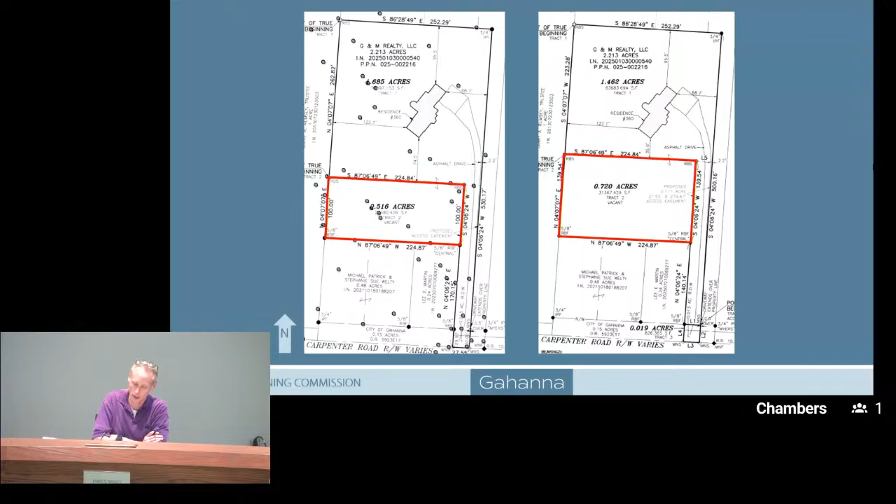Thank you, Madam Chair. Thank you, Mr. Soriano. I wanted to say I appreciate the adjustments made to the size and some of the commentary from last time. I tend to agree with Mr. Shapaka and Mr. Mako. I don't think a hardship has been demonstrated of how the property can't be economically viable beyond what it is today, or why that hardship

would require a variance. I have probably the most concern about the shared access if it changes ownership, and how that works even with an agreement in place. Enforcement of that, and how that's enforced, I think becomes problematic and creates a long-term issue, in addition to the zero frontage precedent. So I'm not going to be in favor.

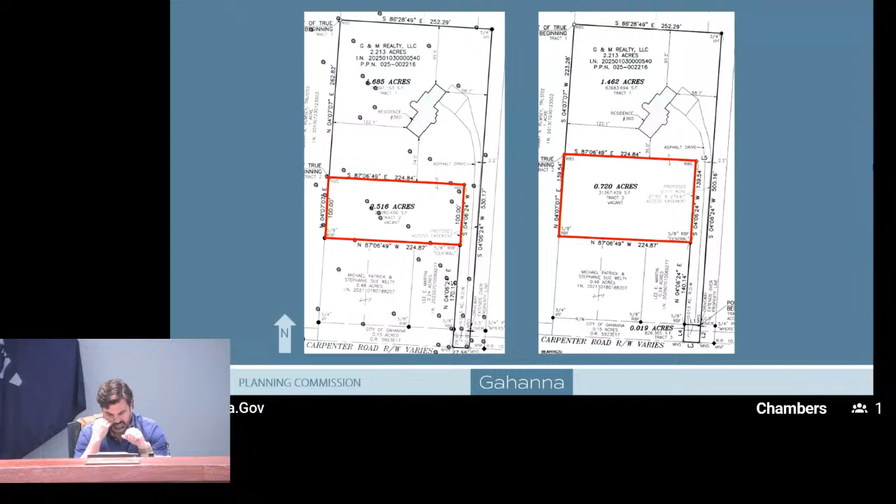Ms. Laser. Thank you. I also had an issue in March about the zero frontage, and when I revisited this, looking through it, I can't get past, we shall, before granting a variance, it's the number one option here: the variance is not likely to result in substantial change to the essential character of the neighborhood. I think it will. I think it will change the neighborhood.

That's a beautiful part of Gahanna, and I agree with what you said. The established character of that neighborhood is unique to Gahanna, and I'd like those parts of Gahanna to stay. I appreciate that you tried to change the lot and make it bigger, but it doesn't change the fact that you're still dividing up the lots, and it will change the character. So I will also be a no vote.

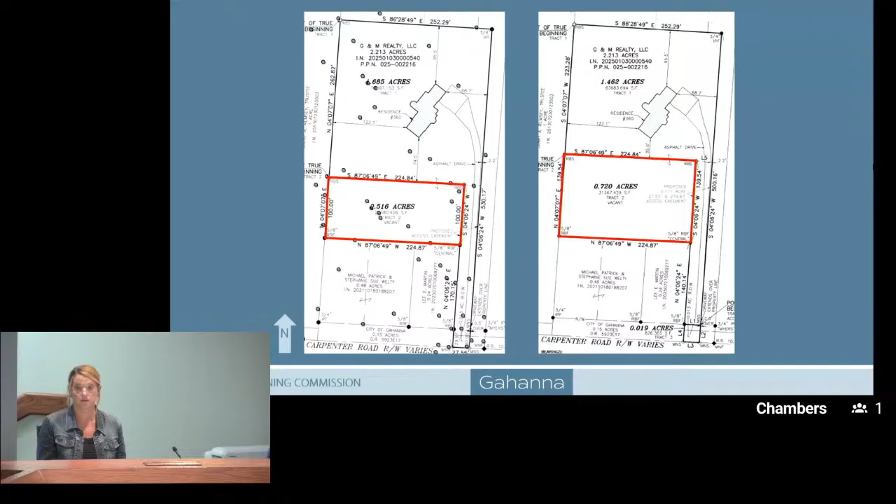Thank you. Mr. Greenberg: I agree with the sentiments my fellow commissioners have already stated, so I will also be a no vote. Mr.

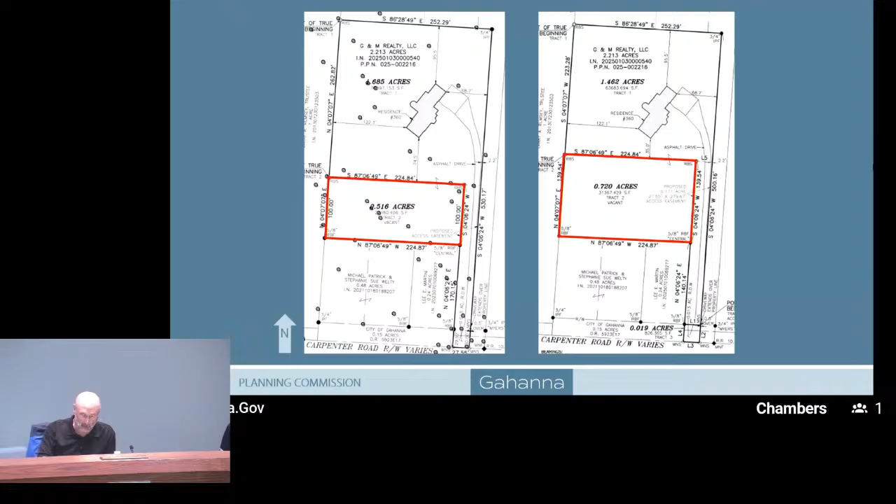Tamarkin. Thank you, Madam Chair. I did vote yes last time, and I will again today. I feel a property owner does have some rights on his properties. This is a very large parcel. No one will know, if we go back into the archives, if at one point this was one big lot with 100 feet of frontage and two houses were added up front and split off at some point in time, or whether when this was originally platted, if it was platted as a flag lot.

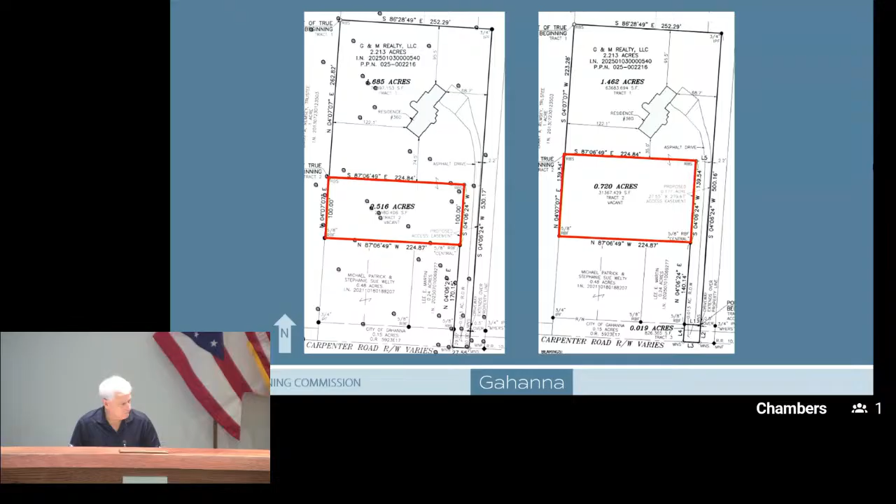That's never been confirmed in testimony. But I do feel that a property owner has some rights, and as long as those rights are within building codes, with water management, setbacks, I feel the owner should have a right to do something with his property. I do appreciate the changes that were suggested, going back and refiguring the property, but I don't think the variance criteria was met, so I will also be a no vote tonight.

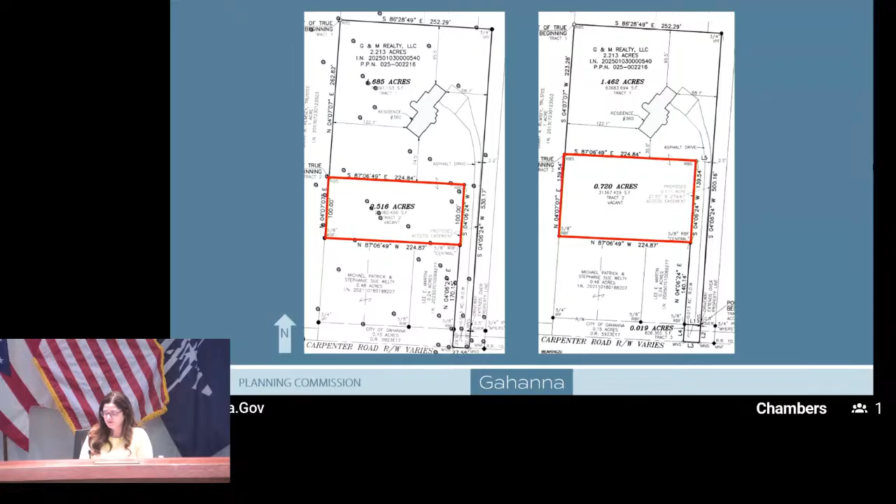Are there any additional comments before we call the roll? Okay, seeing none, Madam Clerk, will you please call the roll? Tamarkin: Yes. Mako: No. Greenberg: No. Laser: No. Pollyant: No. Shapaka: No. Soriano: No. Motion fails.

Thank you. Okay, moving on. Our next project of the night is Gahanna Flex Park. There's a variance application as well as a development plan, and we'll consider both of them together. So I'll read them both into the record.

V-0016-2026, to consider a variance application to vary sections 1109.01A14, parking, access, and circulation, and 1109.04C, buffers and screening of the codified ordinances of the City of Gahanna, for property located on Eastgate Parkway, parcel ID 025-006522, current zoning IM, Innovation and Manufacturing, Gahanna Flex Park, Leland Vogel applicant.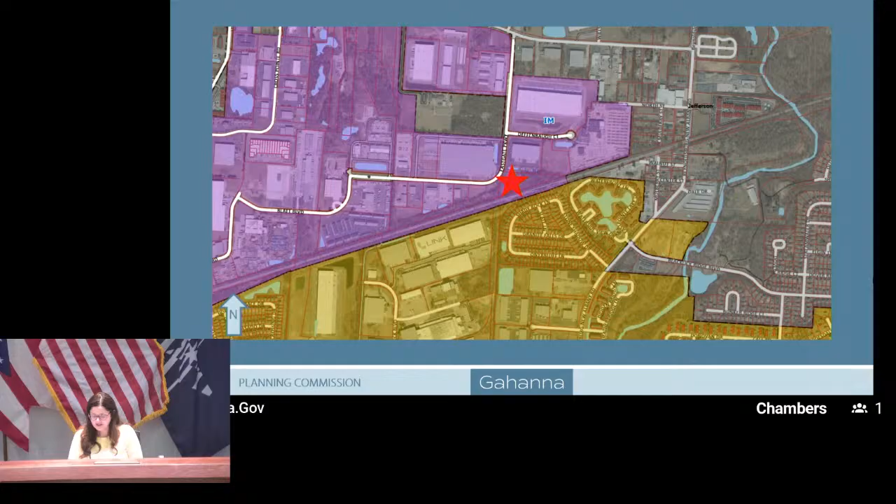Second is DP-0005-2026, to consider a development plan for property located at Eastgate Parkway, parcel ID 025-006522, current zoning IM, Innovation and Manufacturing, Gahanna Flex Park, Leland Vogel applicants. And we will start with the administration for a presentation.

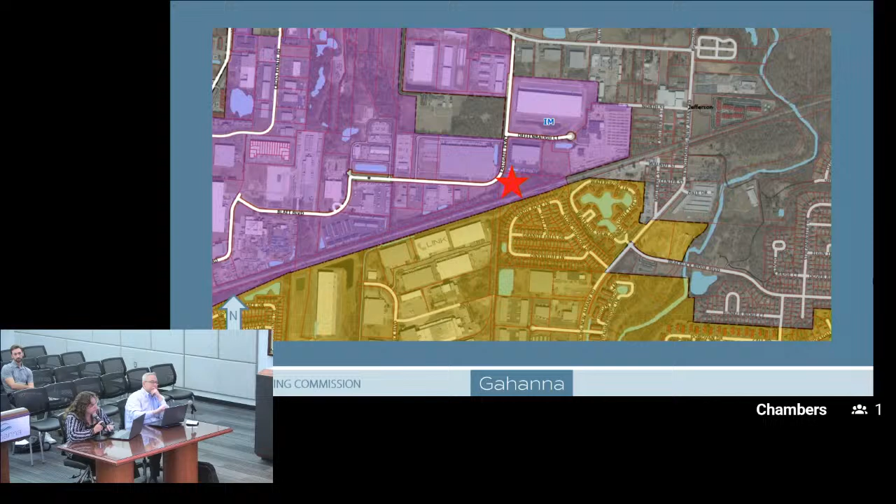These last two applications are for an undeveloped property on Eastgate Parkway. It's zoned Innovation and Manufacturing and located on the east side of the road, kind of around the bend that you see in the zoning map.

The applicant's requesting approval of a major development plan and variance for 3 flex/light industrial buildings on an undeveloped 4-acre site. All 3 proposed buildings are 12,000 square feet and nearly identical, both inside and outside. Each building has 8 tenant spaces at 1,500 square feet, and each tenant space has 1 overhead door and 1 regular door with a canopy.

The primary exterior building materials are gray and white metal panels. Metal paneling is only permitted as an exterior material in IM, so it is allowed in this case.

The zoning code requires a total of 8 parking spaces, and 49 are provided to meet parking needs on the site. There are 2 variance requests related to parking. One is for 1 parking space that's partially to the front of a building, and the other is for a drive aisle that's within the 10-foot side yard parking setback.

There's also 12,000 square feet of outdoor storage proposed at the very rear of the site behind all 3 buildings. This storage area meets all code requirements and would be screened by a 10-foot tall chain link fence with a black privacy screen.

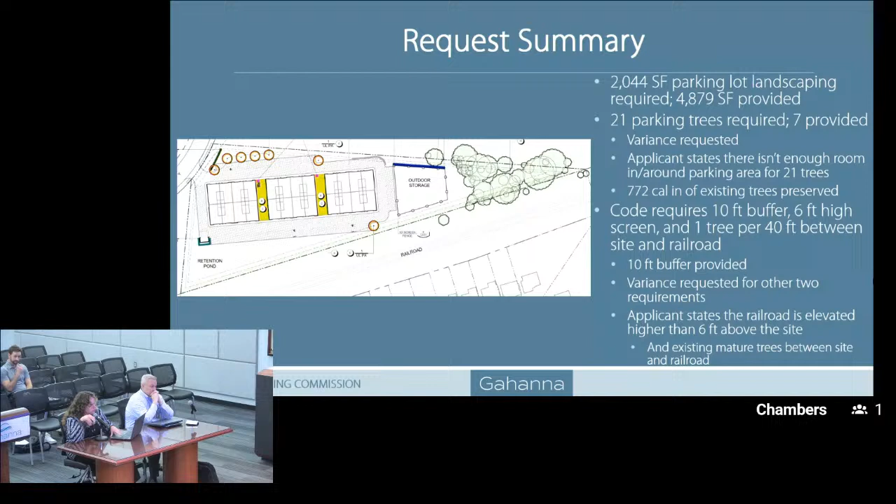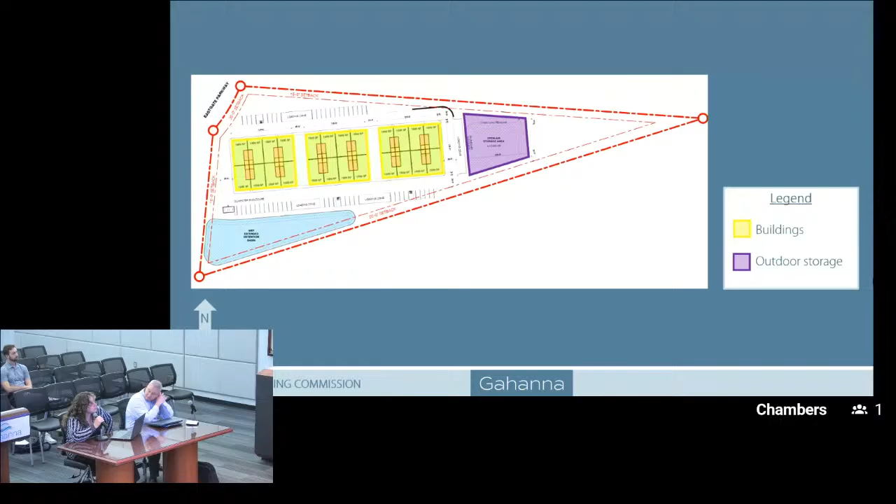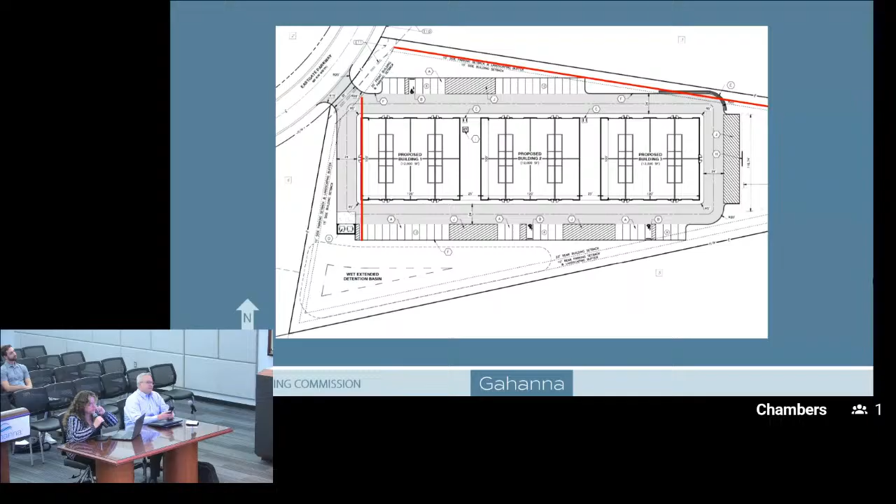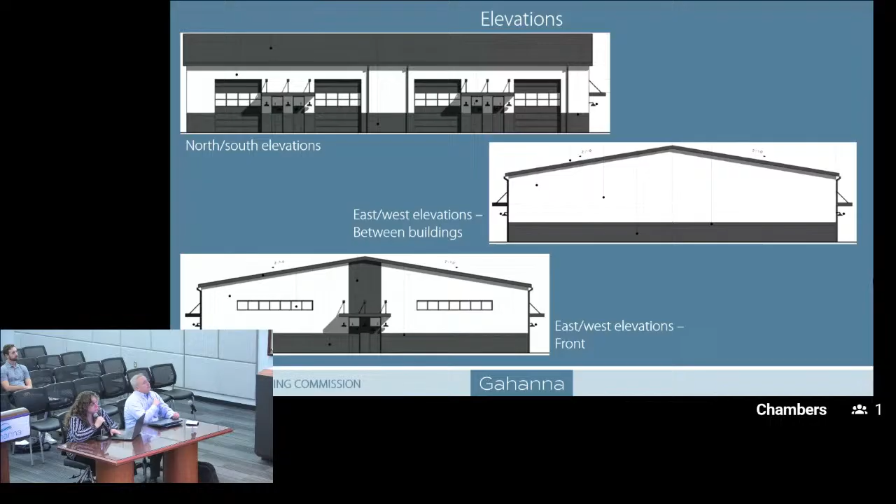The first is for Chapter 1109-01A, which states parking areas cannot extend past the front facade of the primary building. As shown on the site plan, a portion of one parking space extends past the front facade. The next states that parking areas must be at least 10 feet from the side and rear property lines, and a portion of the drive aisle is only 6 feet 11 inches from the north side property line.

There must also be a 10-foot wide buffer, continuous 6-foot high screen, and 1 tree per 40 linear feet. There is a 10-foot buffer, but no screen or additional landscaping. And then the one variance that I missed is for the requirement that there needs to be 21 parking area trees, and there's only 7 proposed.

And then here's the standard variance criteria again. Staff recommends approval of all 4 variances as submitted.

The parking setback variances are minor and necessary due to site constraints. As shown, the lot is a very unique triangle shape, and it's also very narrow, which makes it difficult to meet some of the parking requirements. There's also already some existing landscaping adjacent to the railroad, and the railroad is elevated higher than the required 6-foot high screen.